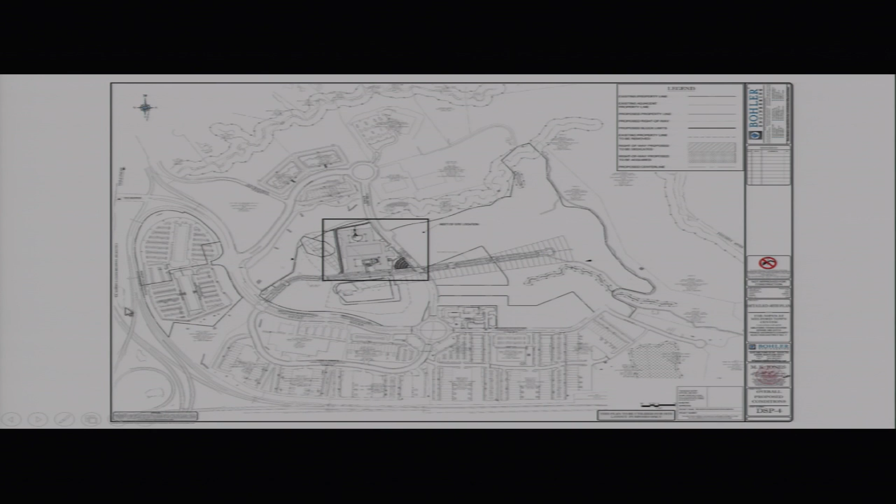This next slide is a more specific location slide showing the property within the Melford community. To the south down here is Route 301, and over to the west is Maryland Route 3. This is Melford Boulevard through here, the traffic circle, and Curie Drive traveling north-south to the east of the subject property, which consists of about 6.6 acres.

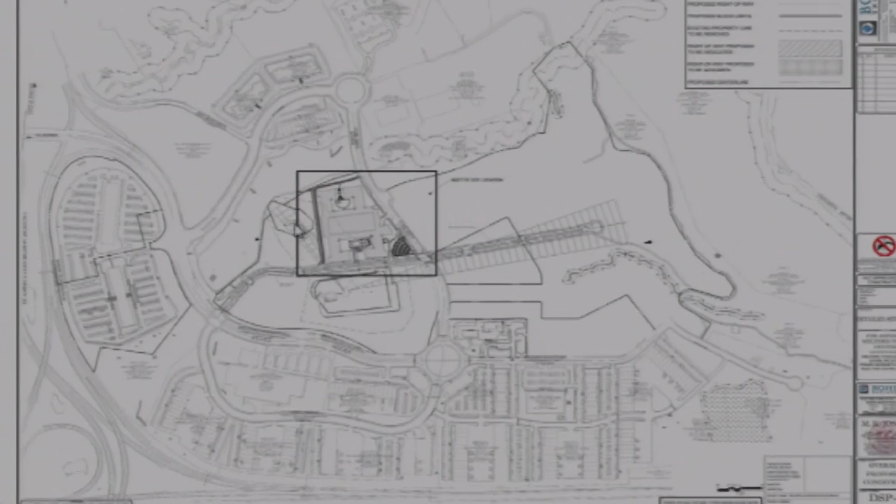The site will have frontage on a future east-west boulevard located to the south of the property. To the north is the existing stormwater management pond owned by the city, as well as a city trail that runs around that stormwater feature. To the west of the property is the Melford Cemetery. To the south, across the future east-west boulevard, is the Melford House. And on the east side of Curie Drive will be some future development.

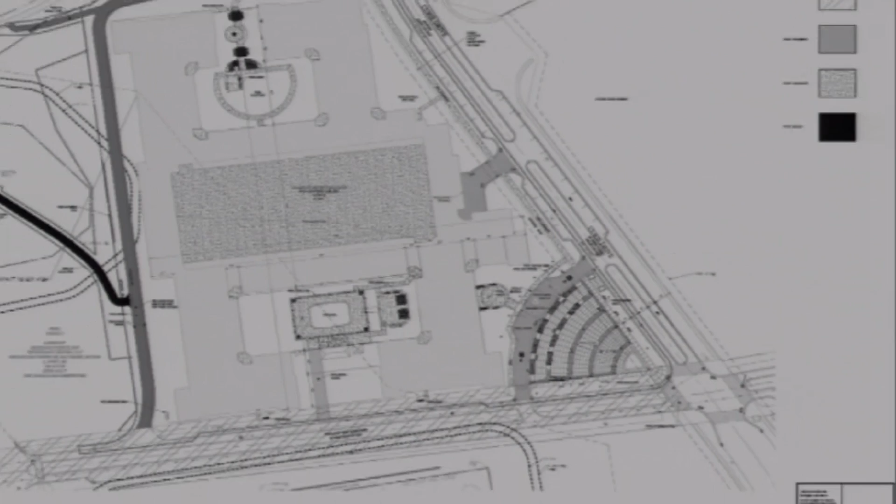This is the detailed site plan of the property. The proposal is for 388 dwelling units in a 4 to 5 story building and a 5-story parking deck for 583 vehicles. There are also 4 parking spaces proposed out front of the building.

This is the main entrance in this location. To the east is Curie Drive, and to the south is the future east-west boulevard. This feature to the west is a fire lane that connects from east-west boulevard to Curie Drive. There is a trail proposed off of that fire lane to connect to the city trail around the stormwater pond, and there's a mulch trail proposed from the fire lane to the cemetery.

This shaded area within the building is the parking structure. The lighter shaded areas are the multifamily building itself. To the south, in this open courtyard area, is a proposed in-ground pool, and to the north, within this courtyard area, is a Zen garden, a passive recreational feature with some walkways and other amenities that we'll show in a couple slides. At the intersection is a proposed open plaza.

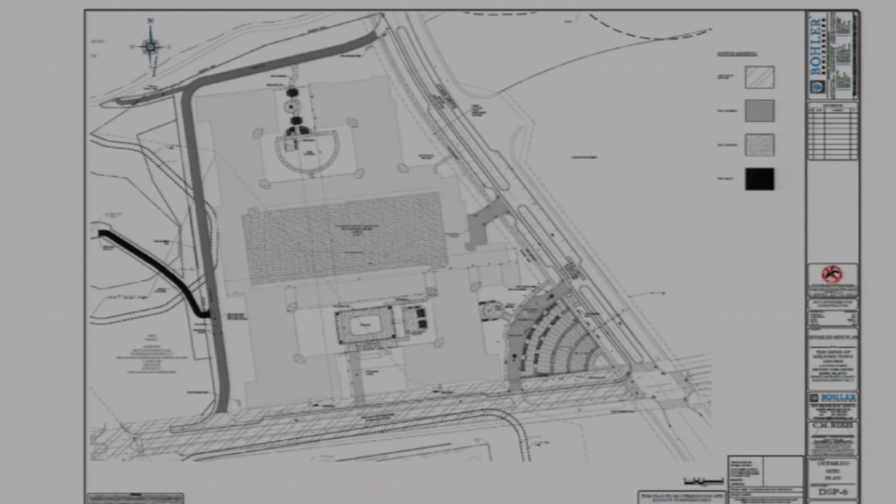The analysis of the detailed site plan begins on page 5 of our report, where we identify the purposes of a detailed site plan identified in section 27-281C1 of the zoning ordinance. We also identified the finding that needs to be made to approve a detailed site plan, set forth in section 27-285B of the zoning ordinance. And we've also discussed the Melford conceptual site plan and design guidelines.

On pages 6 and 7 of our report, we talk about the building and site data proposed for the building, and the access points, which I just reviewed. There's one additional access point, the main point into the parking garage off of Curie Drive, which also serves as access to the service area, trash area, and loading dock area for the building.

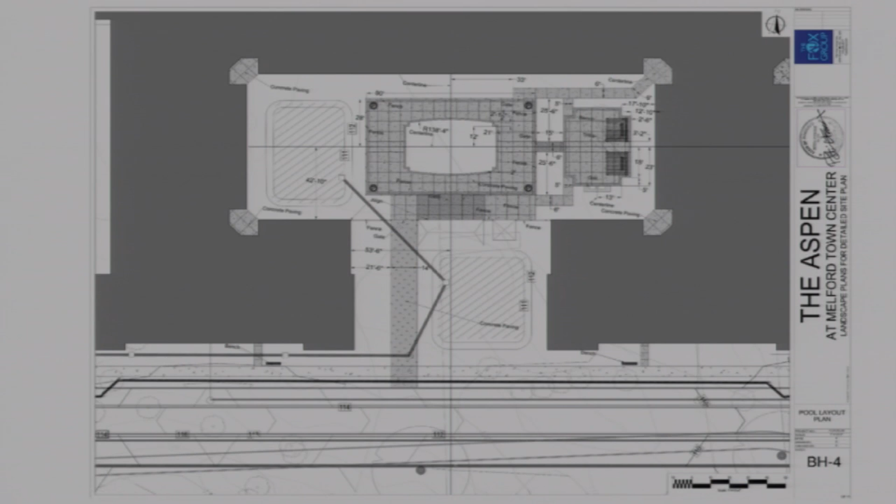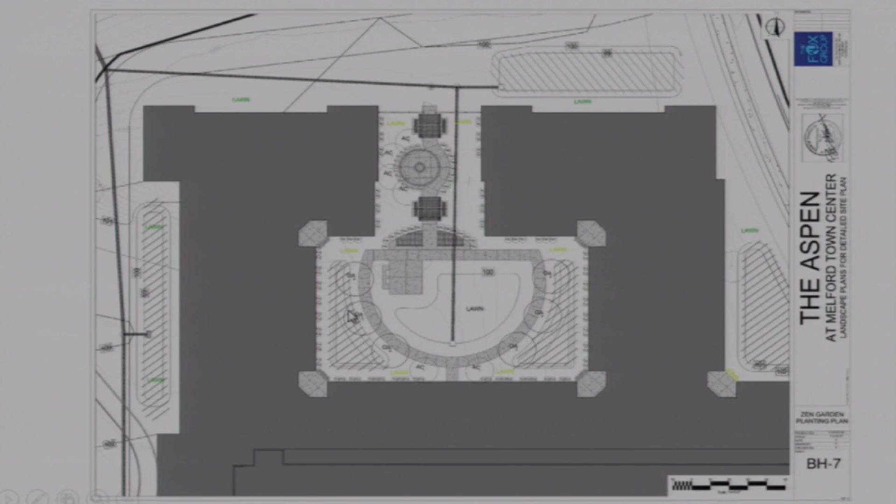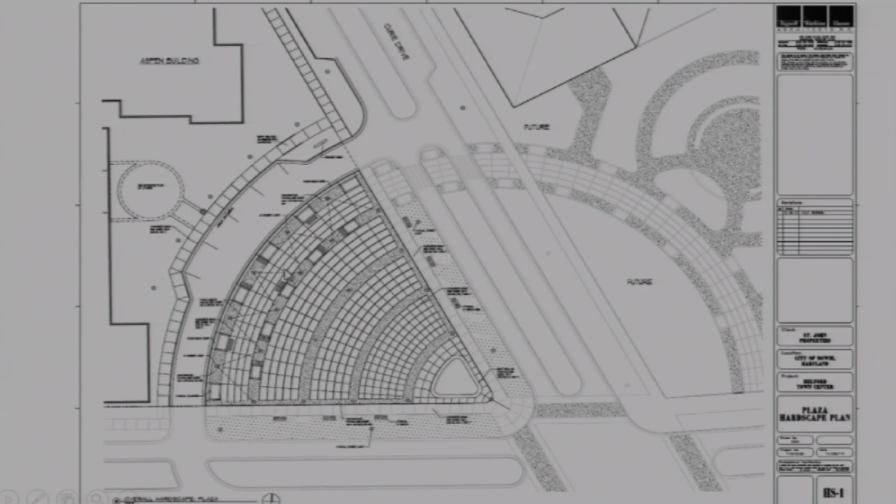The plaza area will include several types of shade trees, lighting features, benches, and a fountain located at the corner. This slide indicates the details of those features within the plaza area: the fountain, the plaza area lighting, and the benches that are proposed.

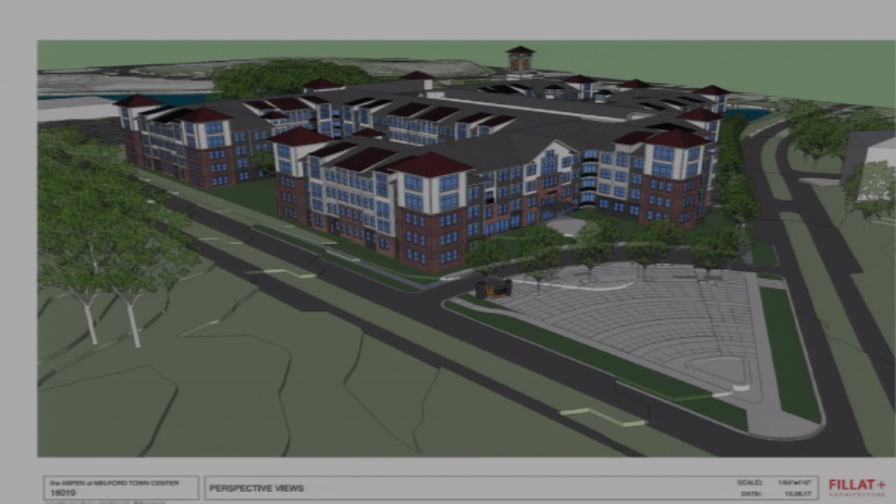This slide is a perspective view capturing the whole site with specific focus on the plaza area and how it relates to the intersection of the two streets and the front of the building. You can see a monument sign proposed at the exit, as well as one behind this tree at the entrance. This is the main entrance to the building, and behind this wall is the entrance to the parking garage.

This is meant to show if you're standing in the middle of the intersection of the two streets and looking straight at the building entrance, capturing the whole front of the building as well as the plaza area and the landscaping proposed in that area.

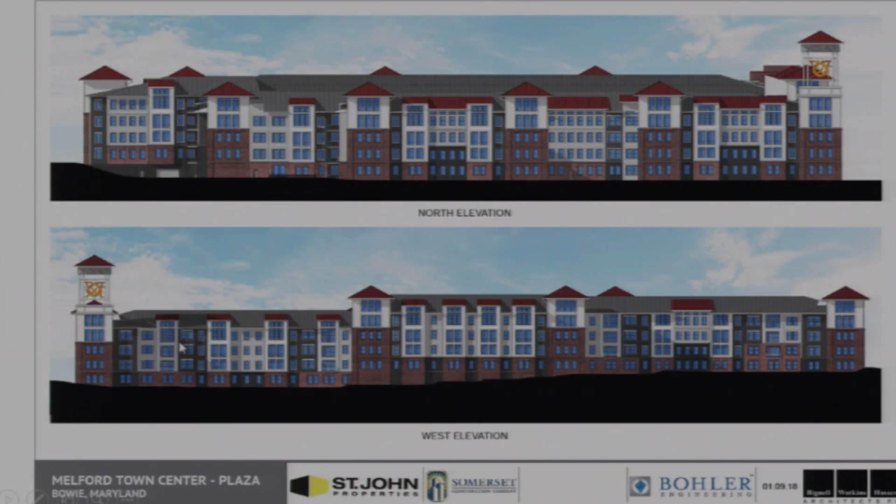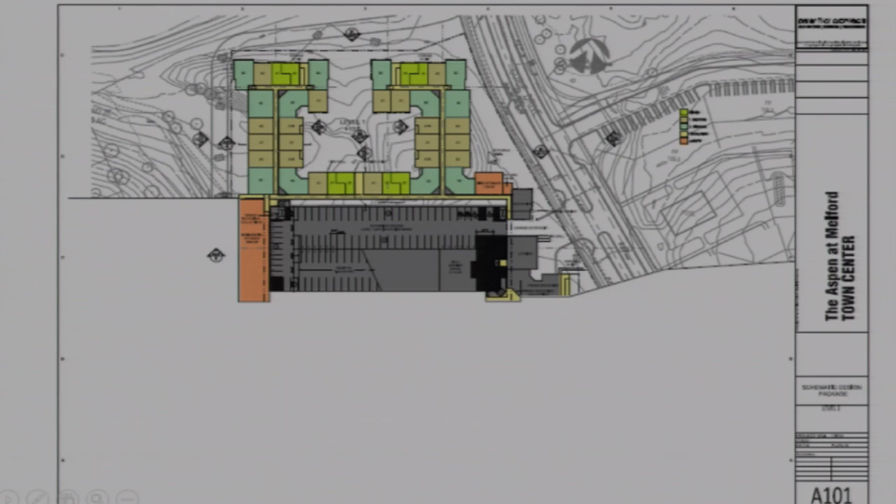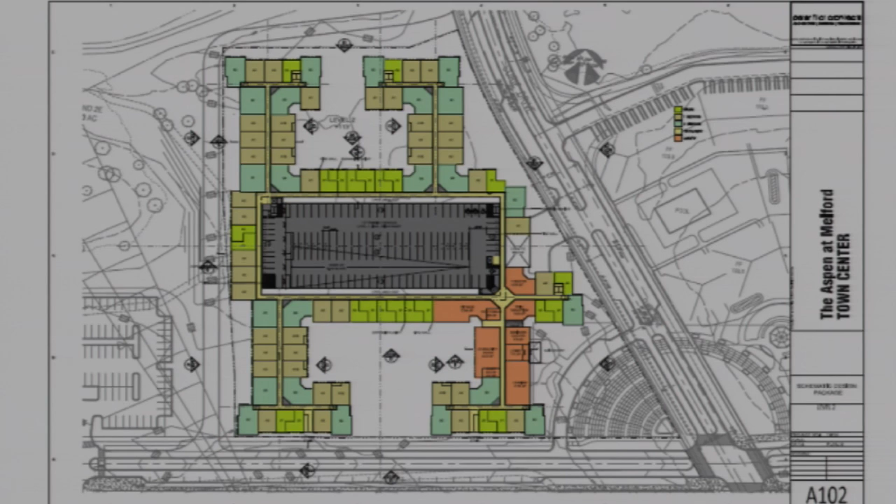This slide is of level 2, which includes several types of units proposed within the project. It shows in orange different amenities provided on this level, including a small theater, a leasing area, a mail delivery drop-off area, a fitness center, community room, business center for residents, and a game room.

This slide indicates the proposal for levels 3 and 4. They're identical to each other in terms of layout, with both the types and locations of units as well as the parking structure. Finally, level 5 is the southern area, looking down onto the outdoor pool, the units in this portion of the building, and the level 5 parking structure.

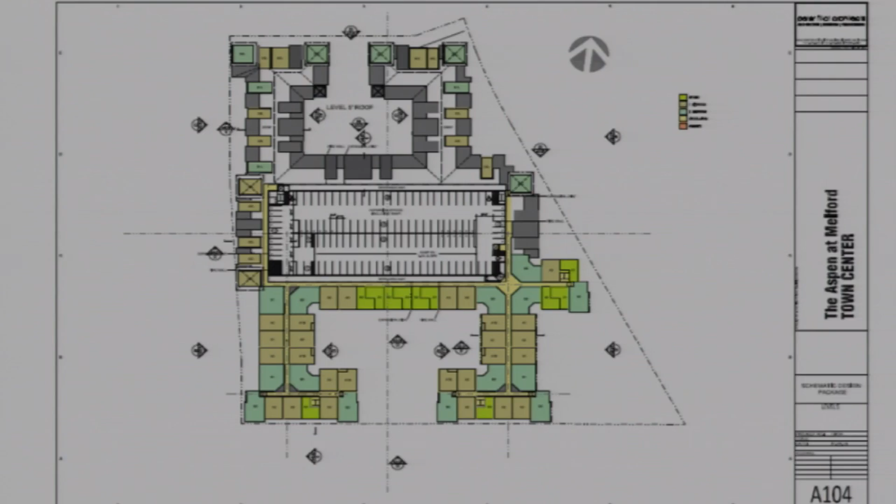This is the landscape plan, discussed on page 10 of our report. There are about 22 varieties of different landscape materials, including shade, ornamental, and evergreen trees, deciduous and evergreen shrubs, perennial plants, and ornamental grasses.

It gives you an idea of the heavy landscaping proposed within the Zen Garden area, as well as around the pool area and the perimeter of the property. The 13 micro-bioretention areas will be landscaped as well with ornamental grasses.

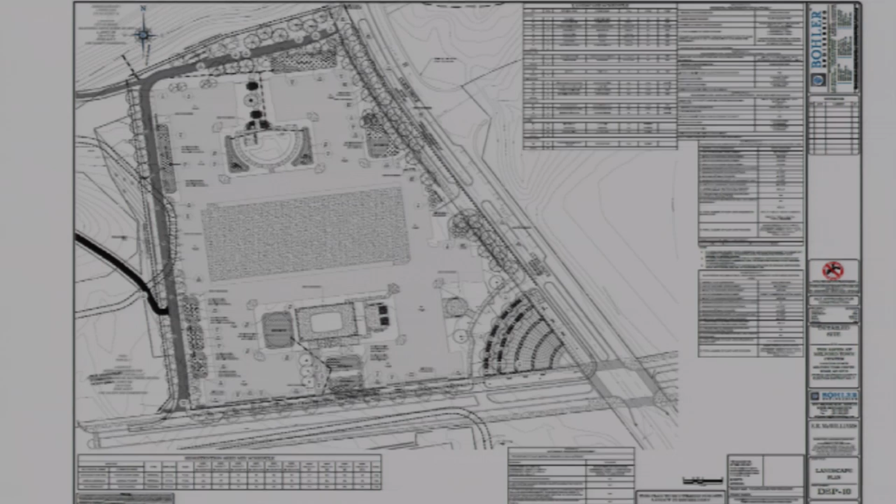On page 13, we talk about the woodland conservation. There are 75 acres provided in woodland conservation on the entire site, and the TCP plans 1 and 2 are in place for the entire site.

On page 13 of our report, we talk about the conformance with the master plan, and based on the discussion in our report, the Melford development conforms to the area master plan.

Finally, on pages 14 and 15, we address the recommendation for approval as well as the conditions. We find that with the conditions set forth, the project will meet the findings for approval established in the zoning ordinance, and that the proposed detailed site plan represents a reasonable alternative for satisfying site design guidelines without requiring unreasonable costs and without detracting substantially from the utility of the proposed development for its intended use.

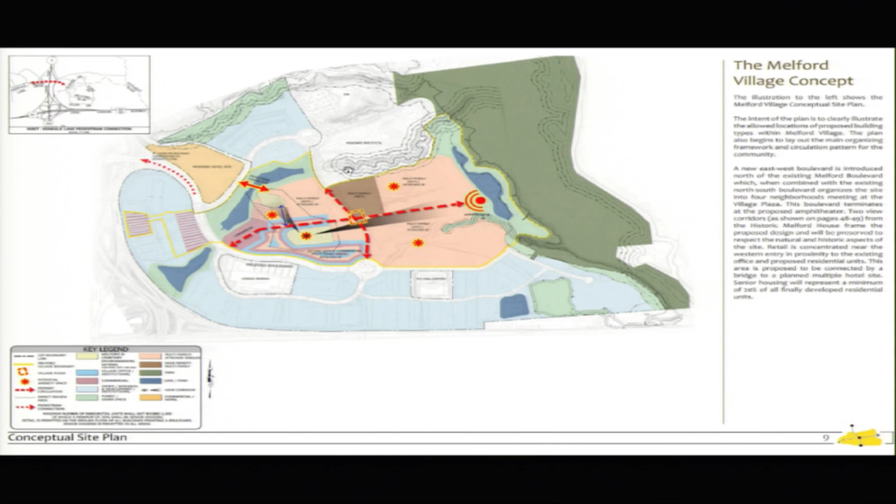Ken, if you go to the next slide. Again, going down the history here, this is the illustrative site plan approved in 2017 that was shown to this board and approved by the county planning board ultimately. What's dotted in red here is the Aspen footprint, which was approved with the preliminary plan of subdivision. As you see, the two view corridors were important organizing elements for the design guidelines.

Those are views from the historic house, one down towards the river, the other showing the historic Duckett family cemetery. We're not allowed to build buildings in that view corridor heading to the north in particular, and this illustrative site plan respects that. If we can go to the next slide, Ken, please.

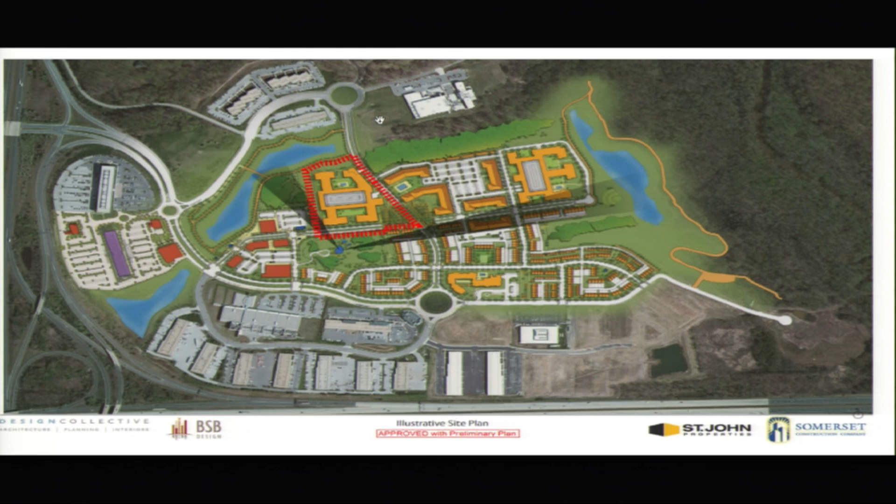So here we have the Aspen building, and I'll let Mr. Fillat speak to it specifically.

What you see here are essentially the four corners of the 6.61 acre lot. That's what this detailed site plan is about—the improvements shown within the four corners of the lot, nothing more, nothing less. How that building conforms to the design guidelines, both in the zoning ordinance section 27274 and the design guidelines approved with the conceptual site plan. City staff and the statement of justification that accompanied this application clearly demonstrate conformance with those two design guideline elements. It also shows conformance with the previous conditions of approval from the conceptual site plan and the preliminary plan of subdivision. We meet all the criteria for approval pursuant to the zoning ordinance for a detailed site plan.

That's essentially the application, and that's the point of analysis I'd suggest the board focus on. What isn't subject to this detailed site plan are several things we heard at the stakeholders meeting—comments we've heard historically for the Melford project as it's evolved from a struggling office park to a planned mixed-use project. Some of the common themes were traffic—what's the impact to traffic in the region? We had a thorough discussion during the stakeholders meeting, and we did that deliberately, because that's not a focus of this detailed site plan. We're focused on the appearance of the building, the architecture, the amenities, and how it fits the criteria of approval for detailed site plans.

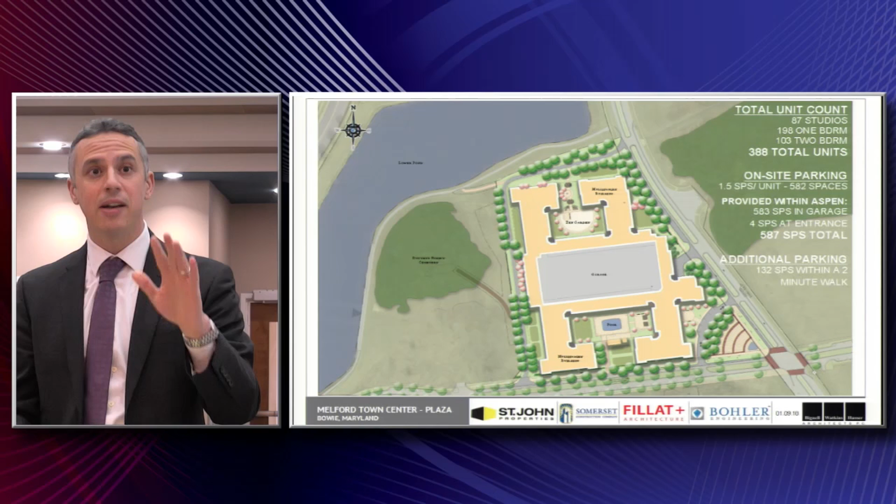Back in 2014, although it's not a requirement or point of analysis for this detailed site plan, I wanted to submit into the record a letter from the fire chief at the time, Marc Bashoor, dated March 31st, 2014, which speaks clearly that the access point from the fire department standpoint is adequate—that in the event of a catastrophic event requiring closure of a side, the median and pavement are wide enough to allow rerouting of traffic and emergency vehicles as necessary. Nobody wants to see that happen, but if it does, there are opportunities for ingress and egress until the situation is resolved.

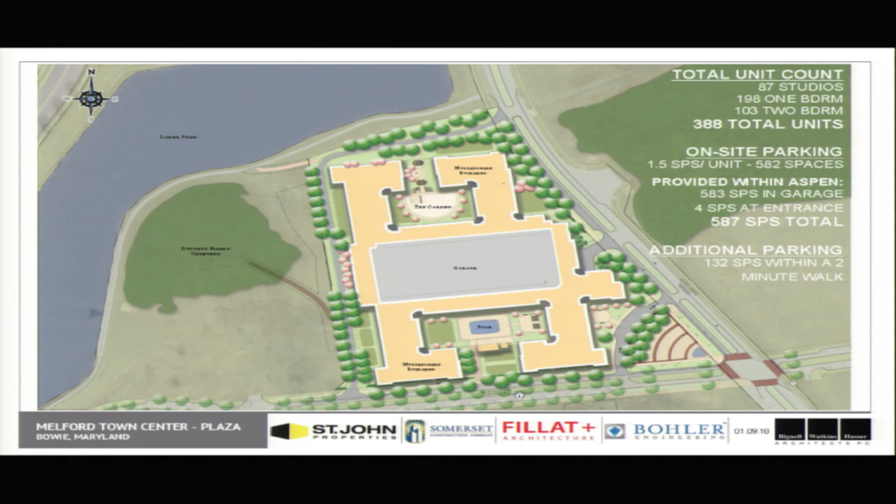The building has a pretty good sized footprint, but the way we break the architecture down is we try to create one larger volume that surrounds the garage, and then break it down into wings that breaks the big mass into thirds. The same thing happens here - there's a wing, space, wing, thirds, thirds, thirds. From there, we break the corners into tower elements, breaking down that piece further. The long facades we break down into a series of vertical treatments. So the building, although large, breaks down in scale and becomes almost like a townhouse type of environment once you move through the architecture.

That's the basic planning. The wings surround these fantastic amenity spaces because the building is large, so these amenity spaces are large too - it's a very comfortable space. That's a really big swimming pool. The Zen garden is a really nice place to be Zen or throw a Frisbee.

Then there are areas in the corners of the building such as this - a dog park, dog walking area, a small pen, and a dog washing area, so there's an amenity for that. The main entrance of the building creates this beautiful front porte cochere. It opens out into a public plaza with a fountain that could be a really greatly programmed space in the heart of Melford.

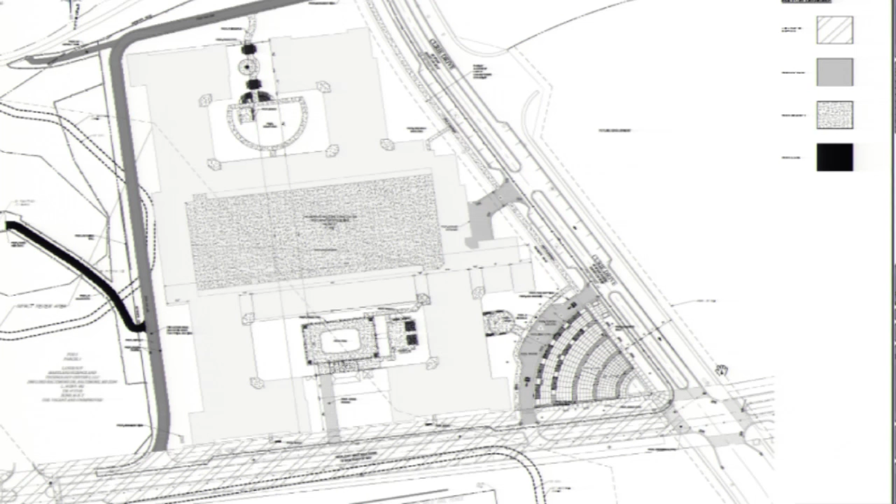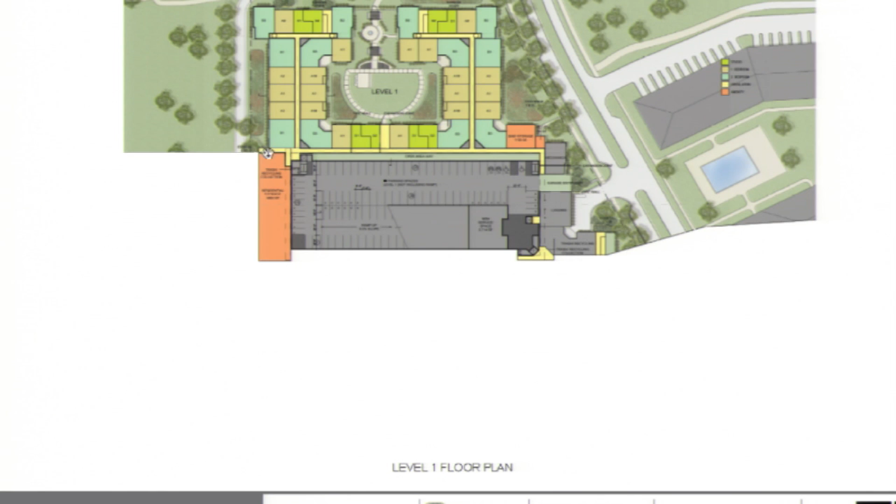Let's see, did I go backwards? All right, so these plans are a little difficult to understand because the building is built into a hill - this is the hillside. The lowest level here is actually connected to the parking. This is the entrance to the parking here, this is the bike storage and dog walking area, and this is a storage area for residents. The storage is also next to the garage and built into the ground, so it doesn't need light.

This is the ground floor plan showing both the entrance to the building. This is, again, the plaza. The main lobby is here.

The community space—if and when you go to Annapolis Junction, you enter the front building and come into a really nice lobby that's two stories. You walk into a community room that is another grand space with pool tables and bars, a really fantastic amenity. From there you look right out at the pool. It's just this welcoming series of spaces that makes you want to stay.

There's a nice fitness center that opens off to this side. There's a movie theater and a really great mail room that has wrapping stations and places for people to collect their packages that come via Amazon.

The leasing office is located here. In the plan, the colors represent unit types: the bright color is studio apartments, the medium color is 1-bedrooms, and the light green is a 2-bedroom unit.

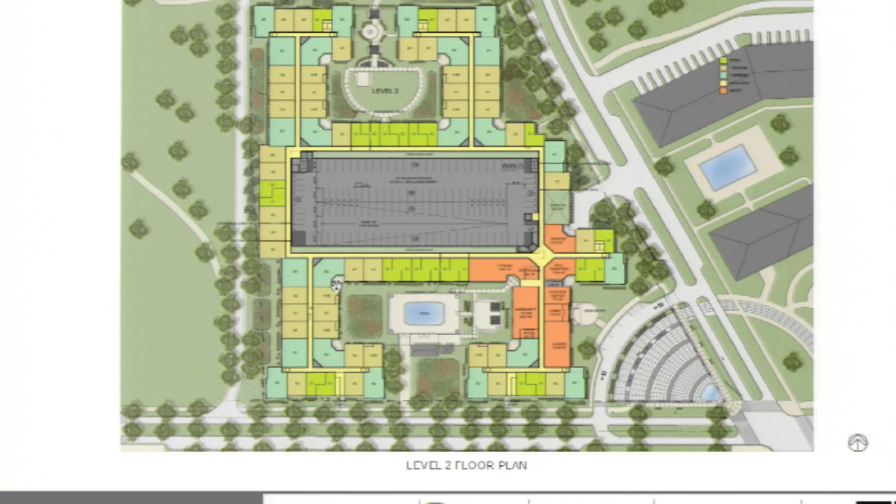A typical floor plan basically follows the floor plan below, but over top of the amenity spaces are units.

So here we get down to the architecture of the building and what I was talking about before. It's a little hard to read, but you can see there's basically a main central portion of the building, with a wing and a wing. Each of the corners of the building is articulated with little towers.

Each of the individual parts is broken down by a series of townhouse elements or grand villa—whatever architectural term you want to call them. The masonry runs throughout the base of the building.

The towers are articulated with three stories of masonry, which recall the scale of the Melford house. The towers and the tops of the townhouses are also articulated with a red standing seam roof taken from the Melford house's standing seam roof. Again, you can see there's a simple cadence throughout the whole building.

This is the north elevation and the west elevation of the building. You can see we've really tried hard to break down the scale of the building, to make it feel like it's a collection of buildings, not just one large building. Although you're looking at a drawing in two dimensions, you really get the feel for it.

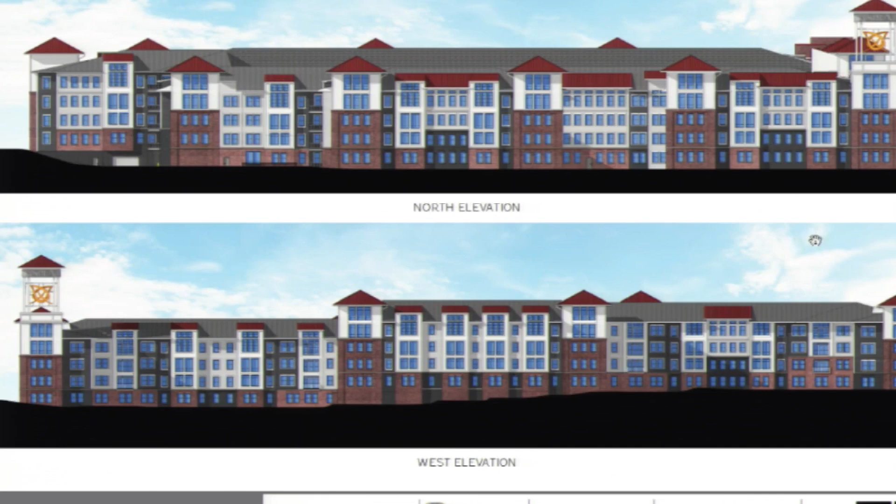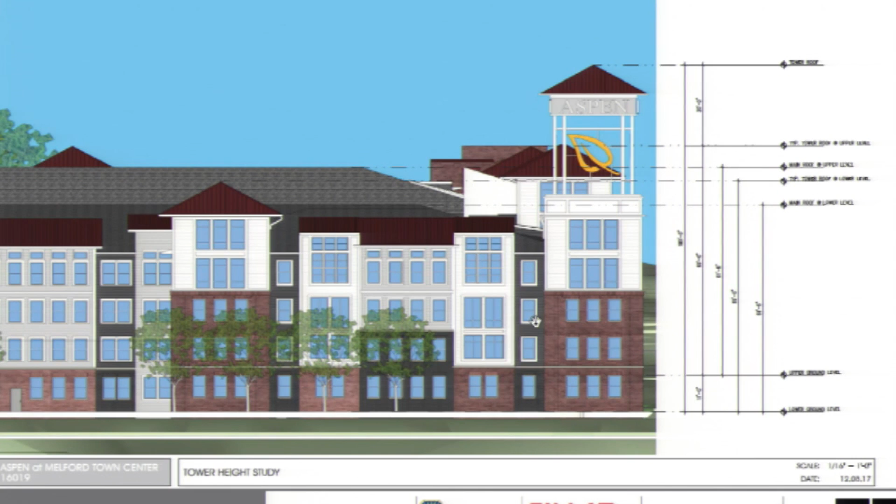This is a little view. The building actually does line up with the Melford house on the west facade, and some of the datums of this roof line carry across and into the massing of the building across the street.

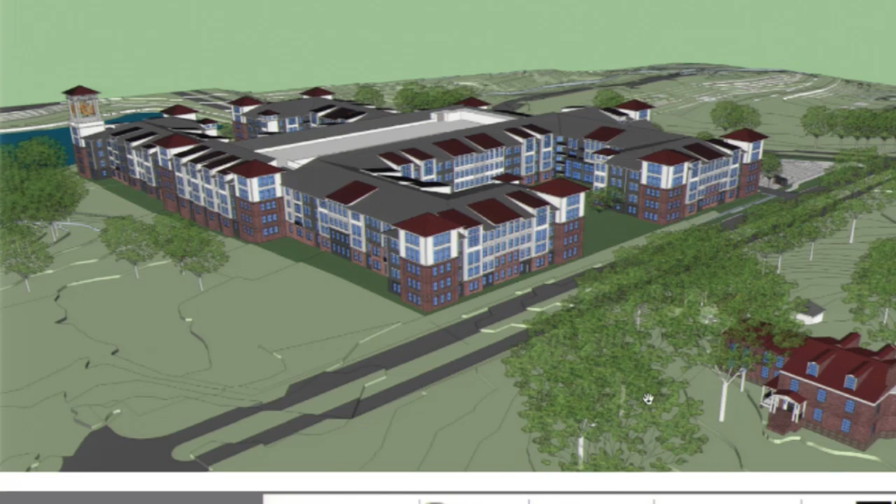This is a view standing in front of the Melford house, looking down and seeing how the buildings relate to each other. These are not steps in the land—they're just abstractions of topography.

The last view we wanted to share shows how the building fits into the design of the major point of the master plan, where the view corridor runs from the Melford House to the cemetery to the stormwater management pond, which is really a lake and feels like one. The building tucks itself behind it, with a bit of an exclamation point at the end that announces the tower around the whole community. But again, it fits into the landscape well.

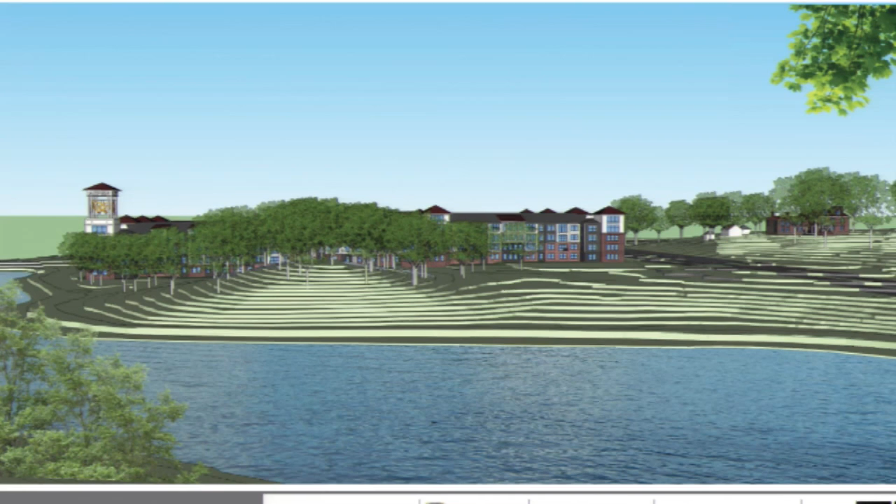We've articulated the building so that it feels like a village or town center type of architecture. We really appreciate the opportunity to show this to you tonight, and I'm here to answer any questions you may have. Thank you, sir.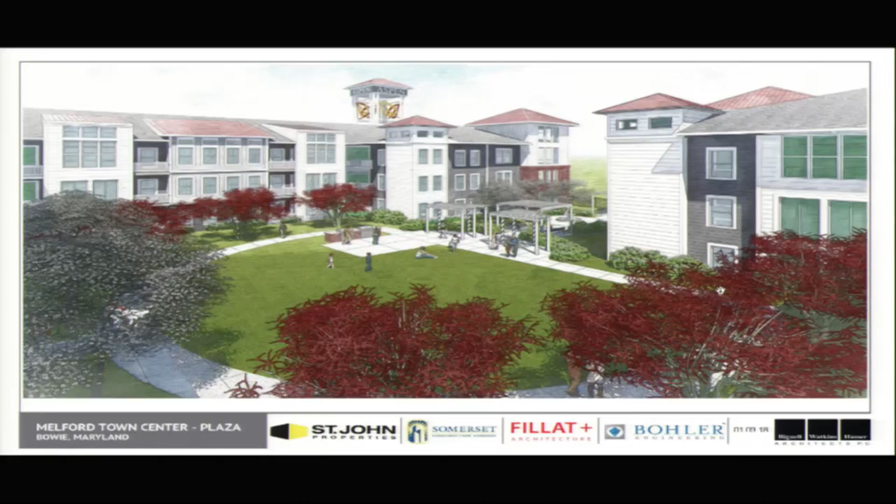Oh, is there more? I thought this was the last one. Want to talk about these? I'll let you. All right, so I guess earlier today was the last slide, so I apologize if there's more.

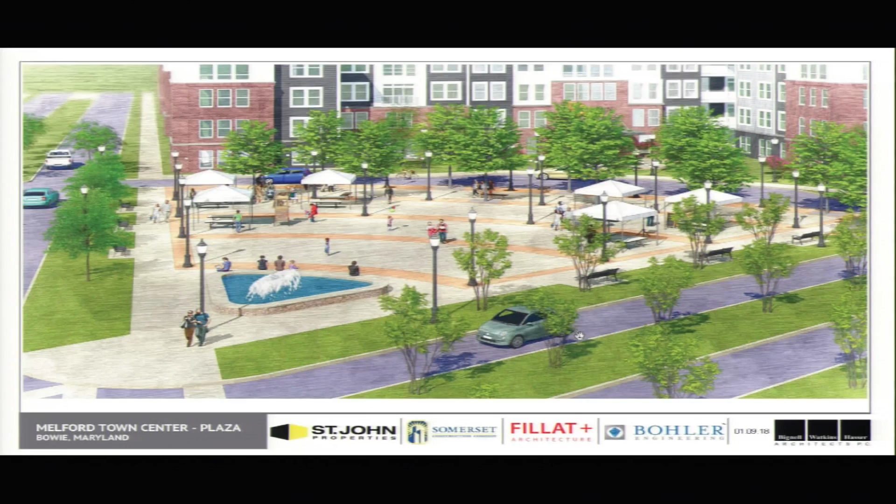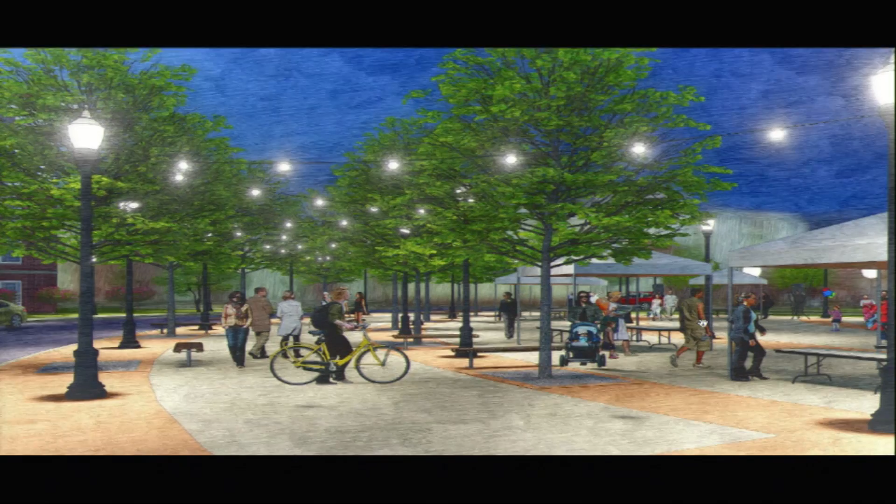Another view looking down, coming closer to the ground. This is east-west over here. This is Curie Drive in the front. And then this is a view of the space in the evening. I think that's the last slide.